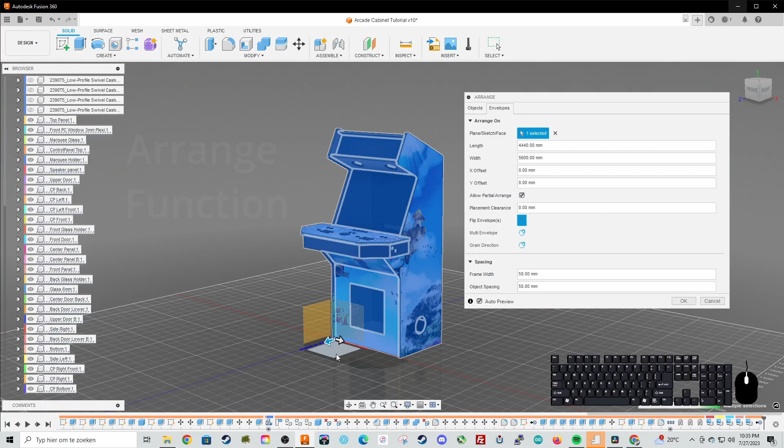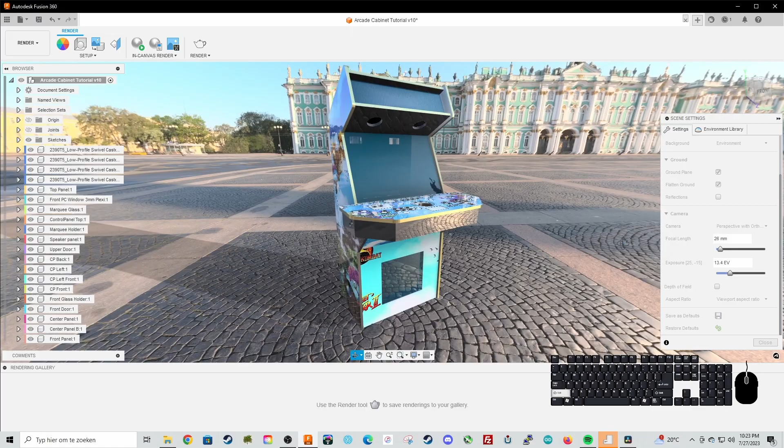Hi, welcome to part 5, the final part of the ultimate guide Fusion 360 tutorial on how to design your own arcade cabinet. In the first few parts we learned how to model this complete arcade cabinet, and it's almost done, almost ready to be built. In this final tutorial I'm going to show you important things like using the arrange function, exporting all the panels so you can cut them in your workshop and make the model. I'll show you how to make technical drawings out of your model in Fusion 360, the joints function so you can open the panels to see how it works in real life, and we'll render it and apply some artwork. Lots of stuff to do. I'm not setting a timer, but I'll try to keep it under 20 minutes. So let's get started.

Let me hide the data panel so we have a good view here. Let's start with the following: remember that we worked on the control panel and designed all the buttons.

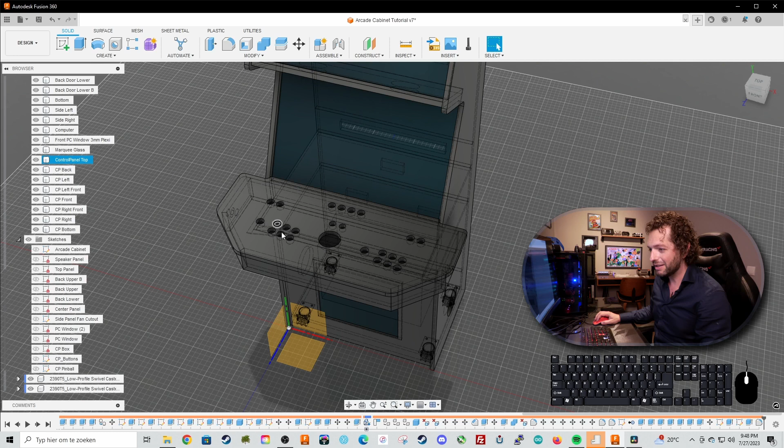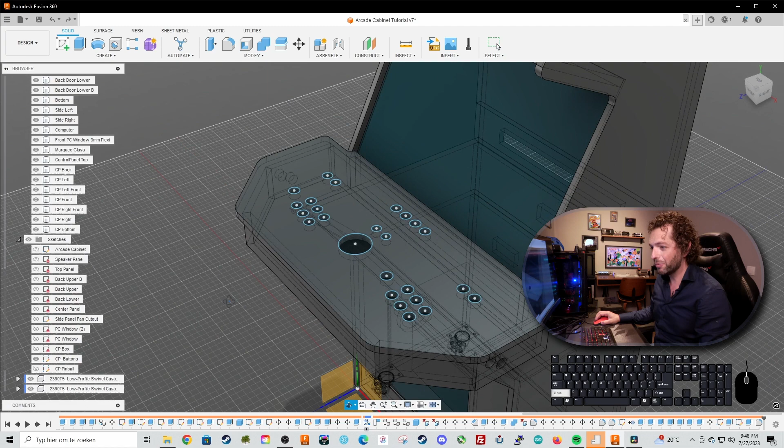This is a sketch, CP buttons, here they are. Remember what I taught you, that if you don't define your sketch and you move one of the buttons, your design will move or update accordingly, which is not something you want. This could be dangerous. Now we can edit the sketch and define all the buttons, but that's a lot of work and maybe we want to change the buttons last minute.

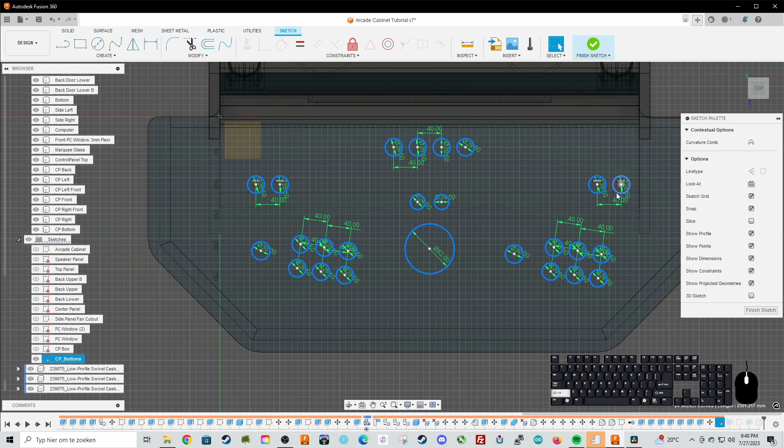So what we're going to do is a quick trick. We select all the buttons, just like this. Normally you should always define every sketch you make, but there's a quick trick. Let me select them all - these are the buttons. Now we right click on the sketch and choose fix, unfix. So choose fix, now the buttons will color green. Let me finish the sketch, and now they can't be moved. If I move the button, there won't even be an arrow to move them. So this is a very safe way of doing it.

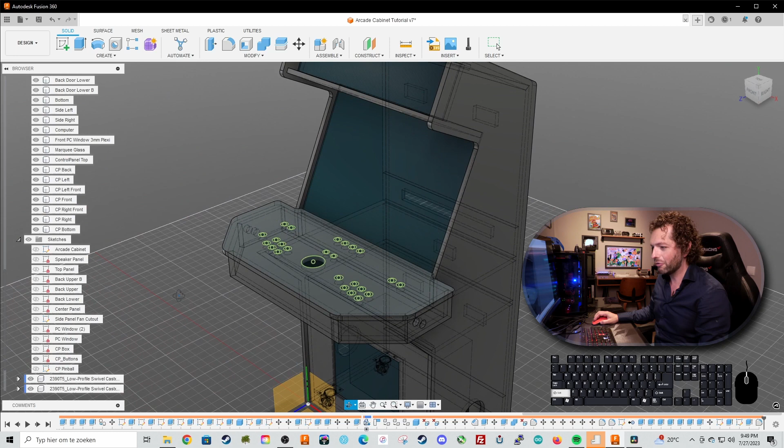Let me close them down. Now the buttons are fixed. Let me save that. And now we cannot move them.

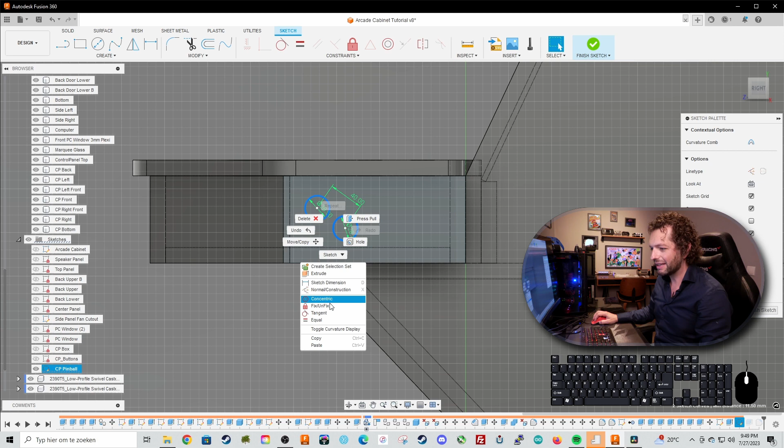And we can do the same thing for the pinball buttons, these are the buttons on the side. Let me edit the sketch, select the pinball buttons, right click and do fix, unfix, finish sketch. So now they are fixed in place.

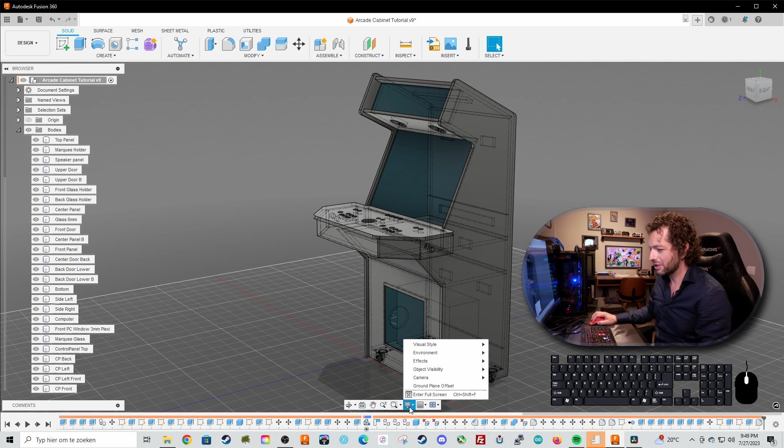Great, let's save the design. Let's get rid of the origin point. Now I'm going to... where's the origin? Here. And now I'm going to show you something really nice. So let's go to visual style and choose shaded with visible edges only.

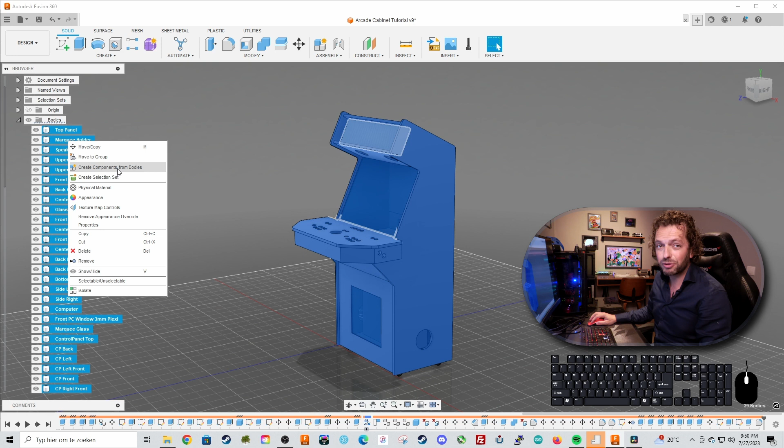And now I'm going to show you how to open these doors. Right now the doors can't move, they're just bodies, and we are going to transform all these bodies. We're going to select them all and transform them. Right click and transform them into components - this is the 'create component from bodies' feature. If we select that, pop, it happened already. So now we have the components made.

Let me show you that now you can take one of the doors and just pull it out. That can be dangerous if you've already completely built your arcade cabinet like we did, but it has some advantages. So let me show you a quick trick.

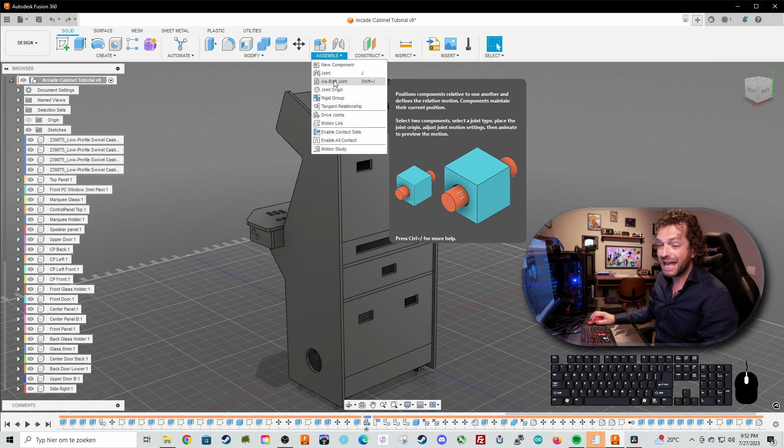Go to Assemble, and you can choose Joint or As-Built Joint. We're going to do the last one, As-Built Joint. Choose type - this is the motion type - to Revolute, which means it can revolute.

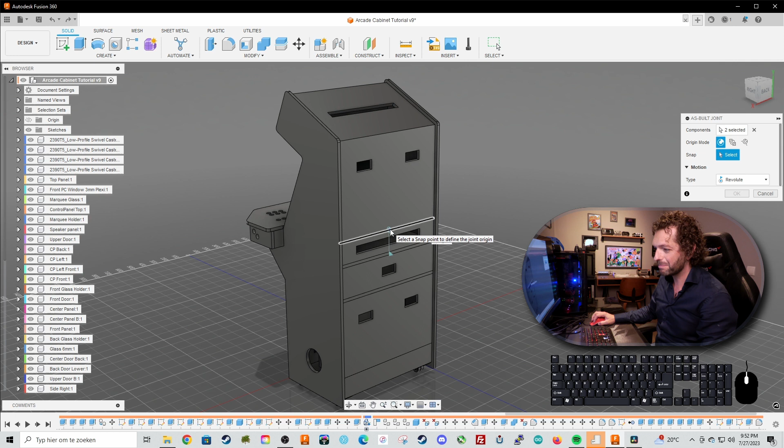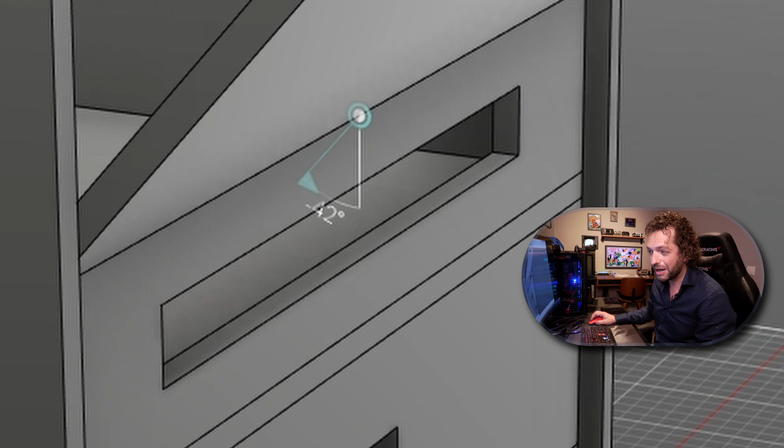Let me select the door, select the panel next to the door, and now select the hinge point, just like this. Now you can see that the door can open. Press OK. You can edit this joint and give it a start and an end point, but let me quickly show you - if you double click on it, now you can open the door, which is really cool. And if the door is open, you can see exactly that it's now open minus 42 degrees, which is really great.

So let me do the other one as well. Let's choose Assemble. An as-built joint is a joint that you use if your model is already built, so the parts that need to slide or revolute are already next to each other at the correct spot.

A normal joint is used if the parts are not at the right spot yet. So maybe this panel is lying flat on the ground here. Then you select the joint and the panels will move together and do the motion you want them to do. But in this case the panels are already at the correct spot.

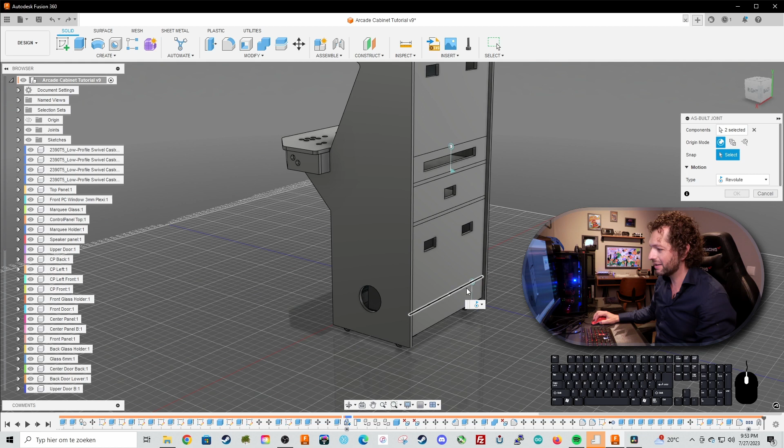So we go as-built joint, a joint just like it is, like this. Make sure revolute is on. Choose the hinge point, and choose OK. And of course you can set a minimum and maximum so the joint will not intersect with other bodies. You can also create contact sets, but that's for another tutorial.

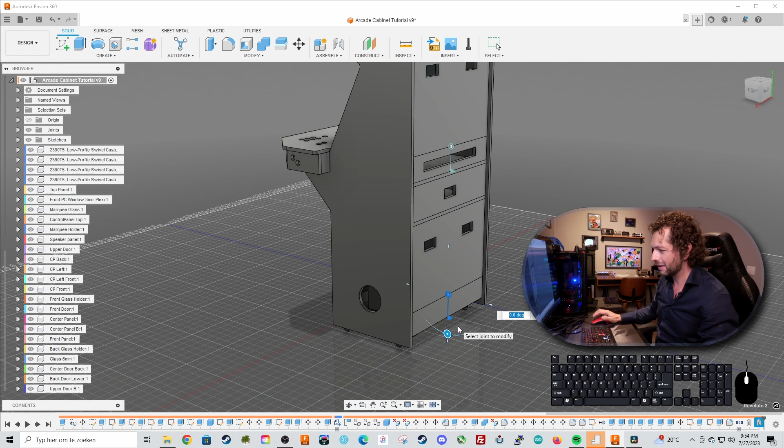But for now this is really cool, that you can open and close the panels. Let me quickly do the control panel so we can see how this works.

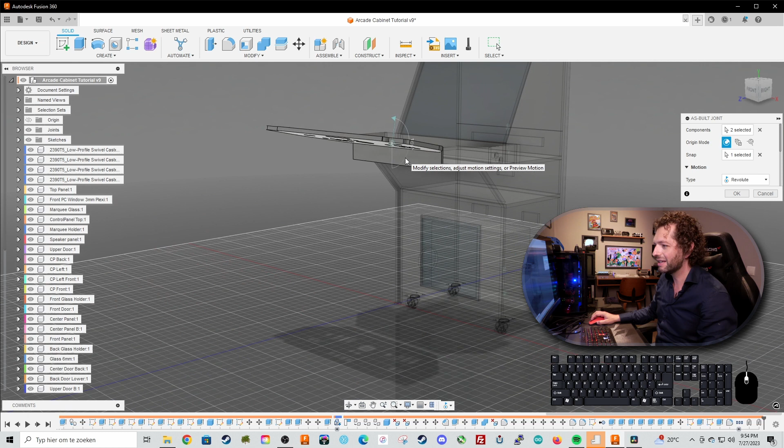Assemble, as-built joint, choose the control panel, choose the part that's next to it. Choose the hinge point, which is right here, just like this. And it's revoluting already, press OK. Double click on the small flag, and now we can just open the control panel, which is really nice. So you have a good understanding of how your model is looking, which can be really, really nice.

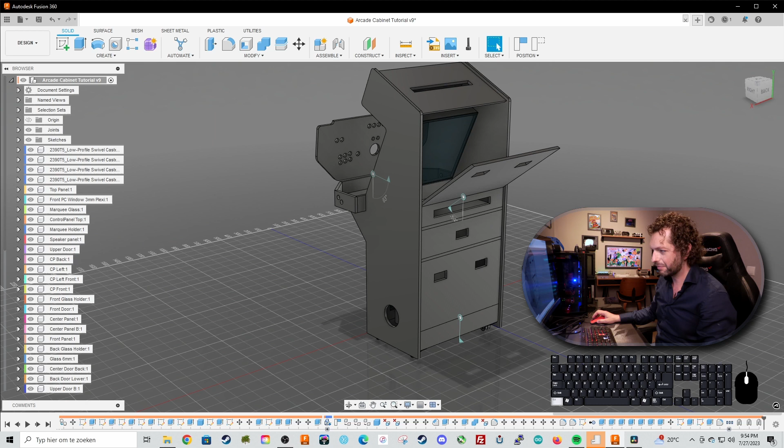Great, now let's hide all the joints. Now let's get some decals on there.

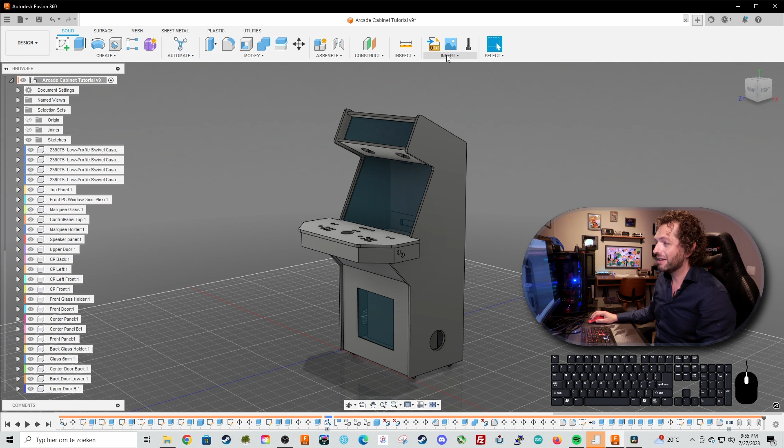Let's say that you already worked on your artwork and now you want to see it on your model. And this is really easy. Make sure that you converted all your bodies into components. Go to Insert and press Decal, insert from my computer. Go to, I think the Adventure Time is right here, one of the side pieces of the cabinet. Select the face of the cabinet, just like this.

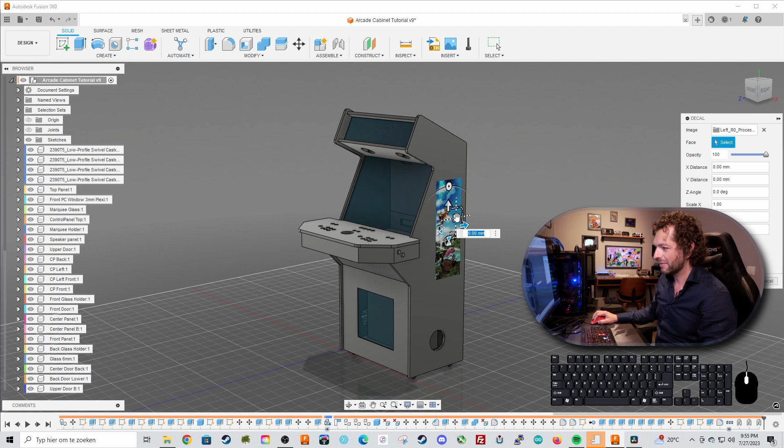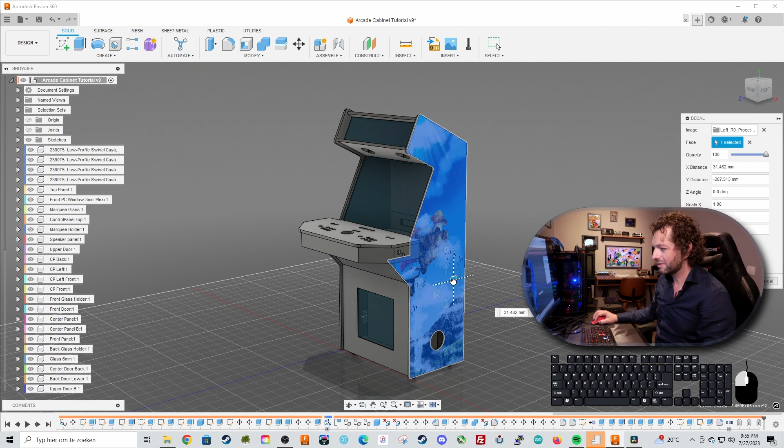Wait a little bit and there it is. Let me make it a little bit bigger here, let me move it around. Make sure that chained faces is deselected, just like this. Maybe make it a little bit bigger, play around with it a little bit. Nice, and it looks really good.

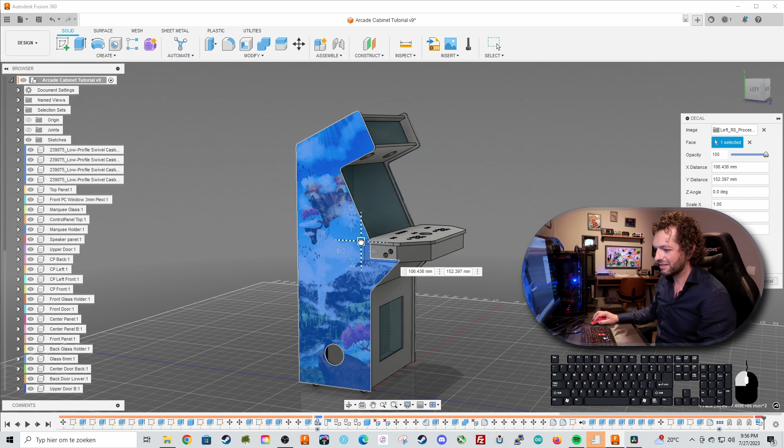Let's do the other side. Insert, Decal, insert from my computer. And you could do JPEGs or PNGs, doesn't really matter. Make sure chained faces is deselected. And there we are, and there we can see Guybrush Threepwood from Monkey Island.

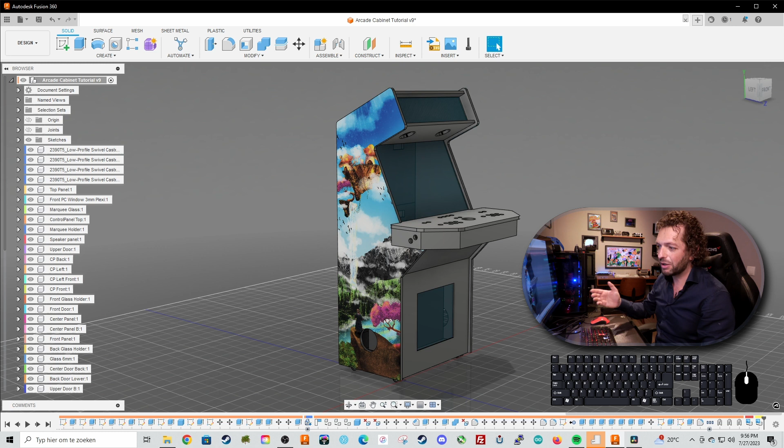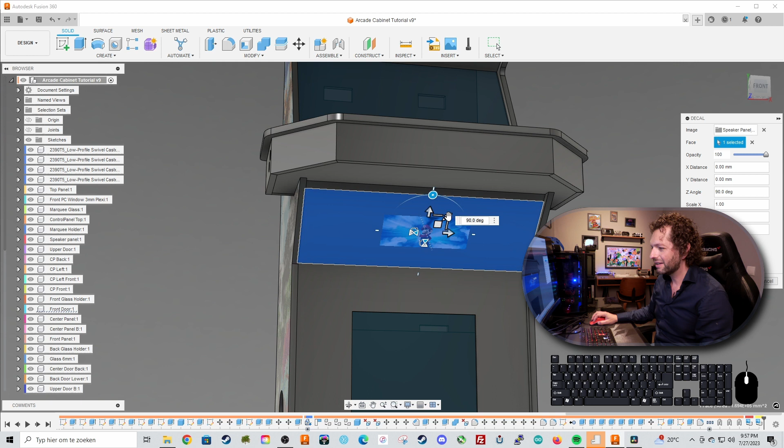Let me select another decal, a speaker panel with Super Mario on it. Let's rotate it, let's put Mario in the middle. And as you can see, this way you can change the complete look of your cabinet.

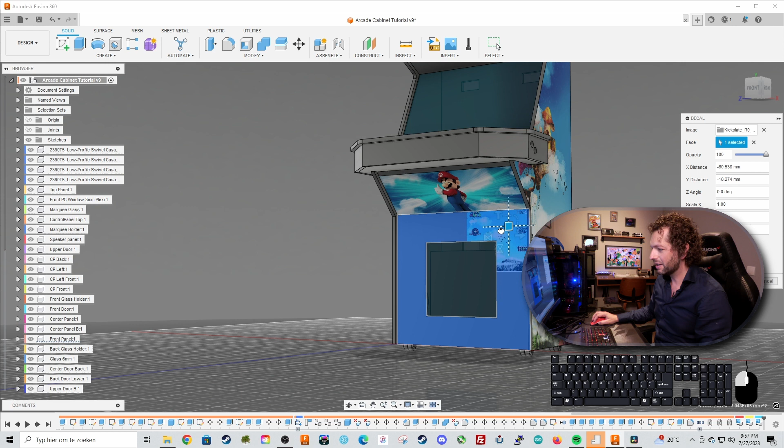Insert decal, insert from my computer. Now there is a large window in this panel which makes it a little bit more difficult for the computer to get it in the right position. So just do it like this. So you cannot really drag it here, it has some trouble with it. So I just make it bigger, or even bigger, just to get a basic idea of the colors, just like this. It looks great already.

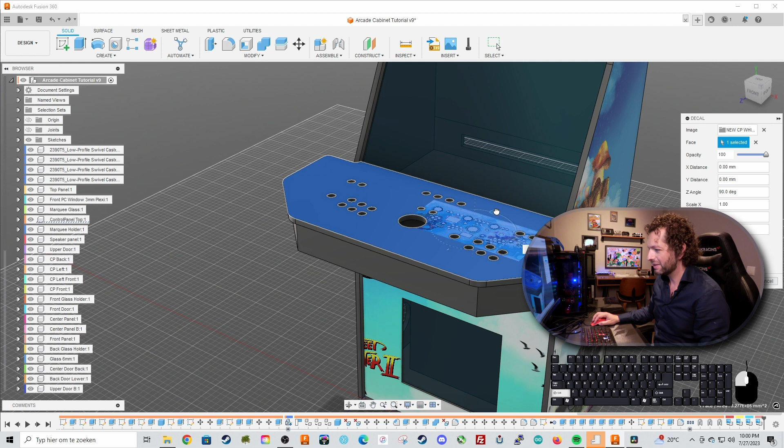Now, for those of you who are interested, let me do the control panel top, which is also interesting to do. Decal. Well, of course, this is a 4-player control panel file, but you get the picture. Let's get it here, let's turn it around a little bit, just like this, make it a little bigger. And it's just to give you an idea of how this works. And because of all the holes, you will not get it perfectly correct, but it's just to give a basic idea of the cabinet, how it would look in color.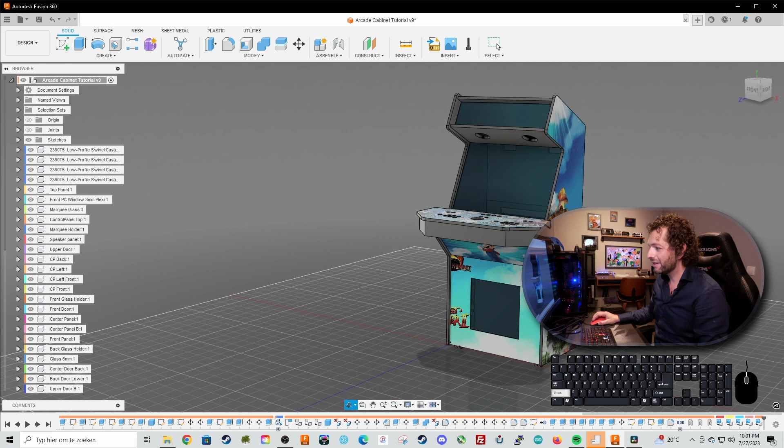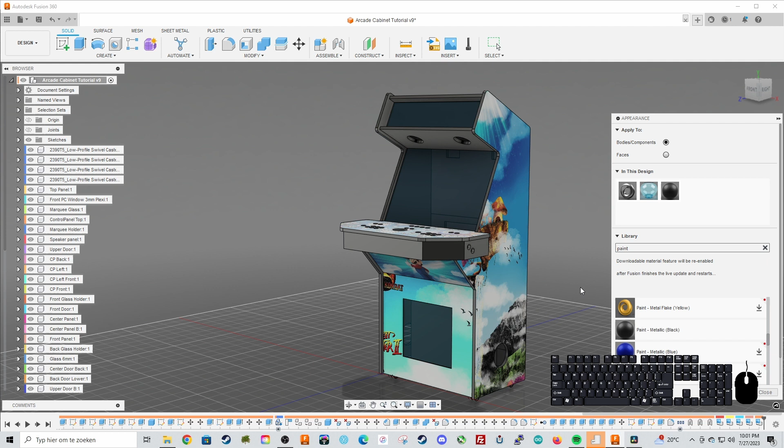The other thing is we could give it some texture, so right click, choose appearance, and let's do some painting. Choose paint and let's take a metallic black, or let me see, powder coat metallic black. Let's try this, yeah, this looks great. Metallic black, just drag it on. Painting was never that easy. All the panels that you want black, you can make black.

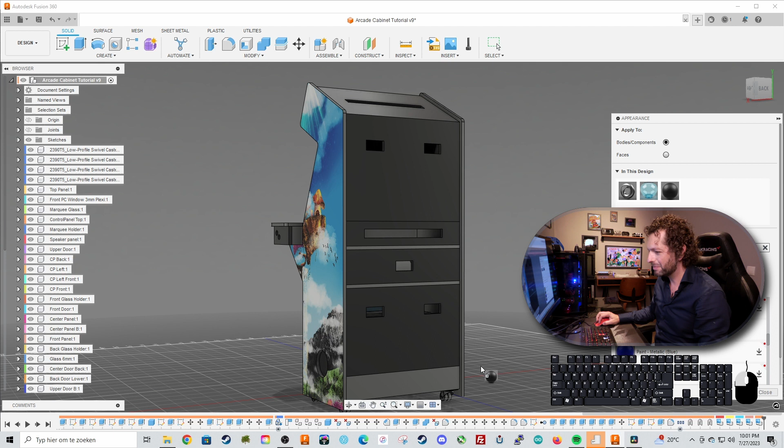Let's do the back of the cabinet, just like this, all the panels. Maybe also the center panels, just like this. Oh, just like this. Oh, again, just like this. And now, so the bottom as well.

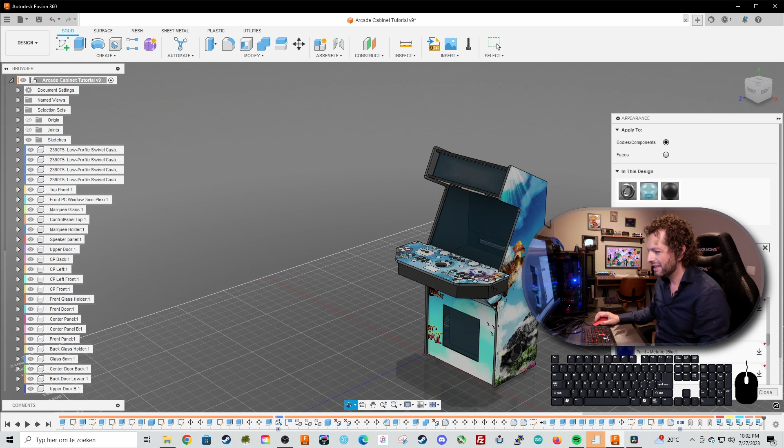Let's add some T-molding, which is also nice, and let's go for gold. Let's see if they have gold T-molding - I mean a gold appearance.

Let's drag that and make sure now that you select faces. Go to the part where you would apply the T-molding and just select it here. If you don't select face but bodies and you do this, now you can see that it gives you a warning and it asks you to remove appearances.

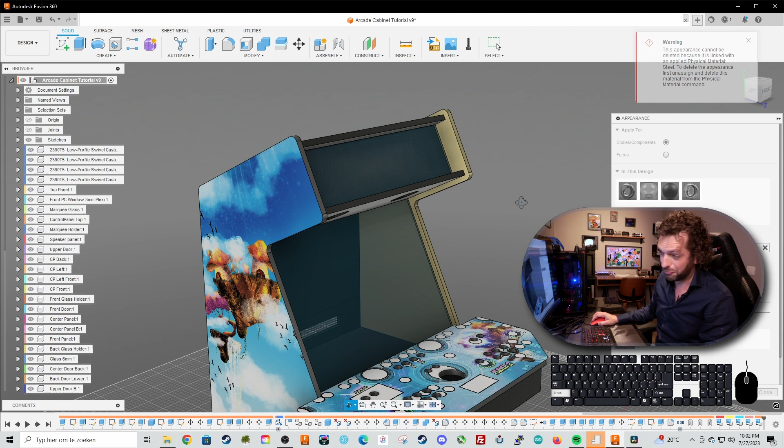If you remove it, now you can see that the entire panel is made out of gold, which is really cool, but it's not something you generally want. So let's undo that, undo that again, just like this.

Now we right click, appearance, gold, make sure faces is turned on, and let me drag it onto the faces. Let's do the control panel, and now we can do the entire cabinet. Let me do that quickly for you and I will be right back.

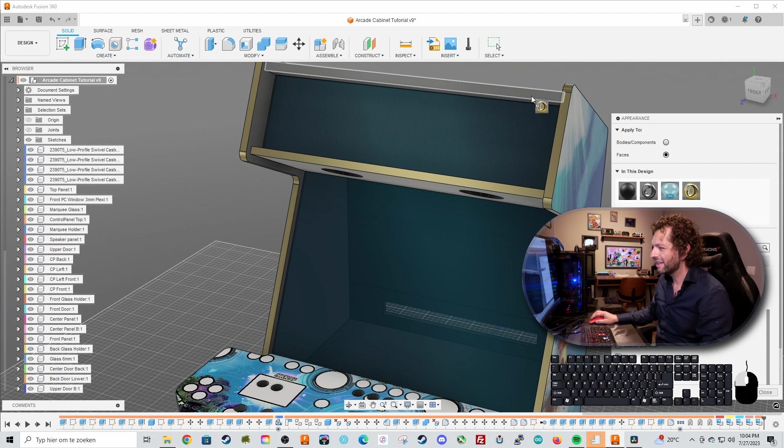And we are done. It would be cool if applying T-molding in real life would be as easy as this is. So great! Our cabinet is looking really, really nice already.

Before I show you how to use the arrange function and export all the separate panels so you can build it in your workshop, I'm going to show you quickly how to make a technical drawing, as you would really need this in your workshop to know all the angles, the miters you need to cut, to see the place of the bottom, the offset and all the dimensions.

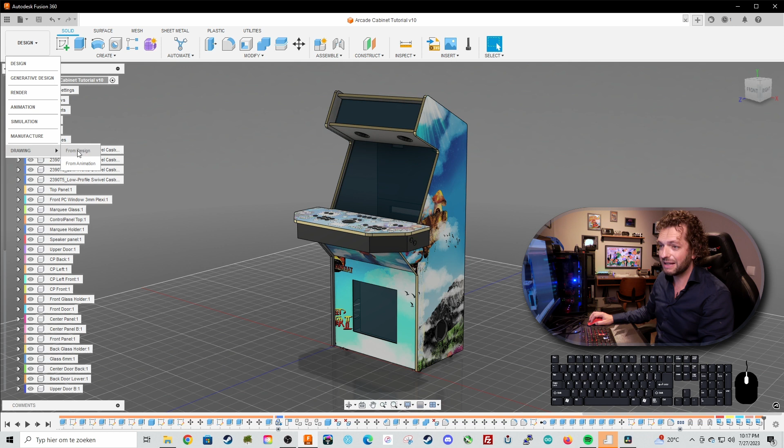So to do this, go to the design button here. We are now in the design environment, but now we are going to the drawing environment, drawing from design. Let's select that - this will take a little while. It selects all of your components or bodies.

Choose the paper size. Let's go for a standard A4 letter format, full assembly, and select OK. This will take a short while. And now we should see a standard letter size piece of paper.

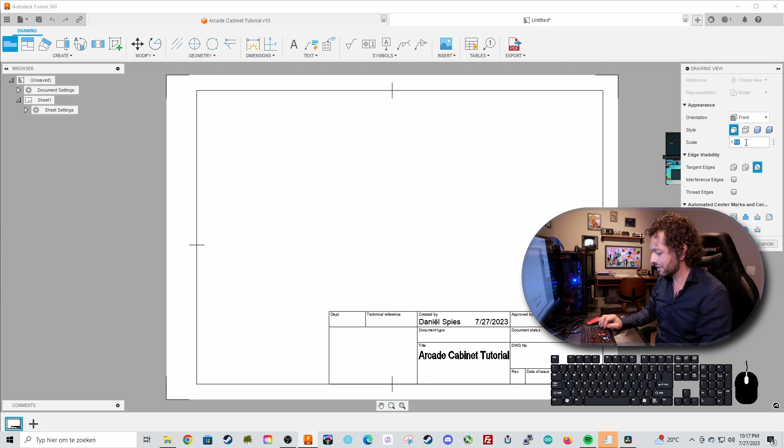Great. With your name on it, with your title, your project title, and you can see the small arcade cabinet already. Let's make it a little bit bigger in scale. Let's say one is 25, maybe one is 15 even, just like this. This will be perfect. Let me place it here, just select it and press OK.

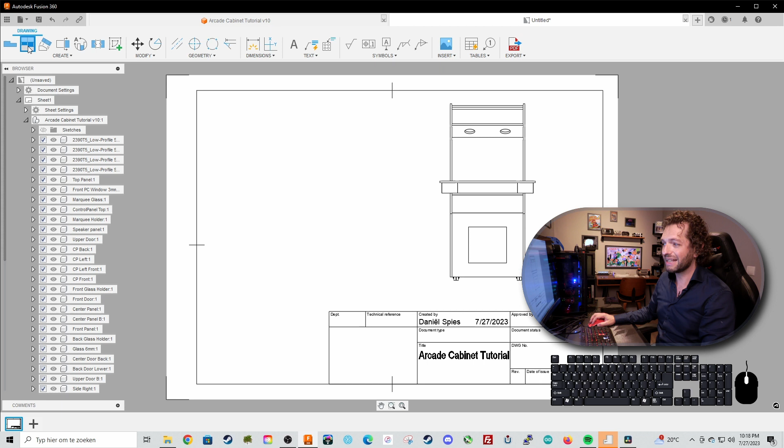And now it made a drawing, a beautiful drawing out of your design. Now let's click the projected view button at the top left corner, select that, select your parent view, drag the mouse cursor to the right or to the left, or even the bottom if you prefer, or diagonally, and you can see that your design changes accordingly.

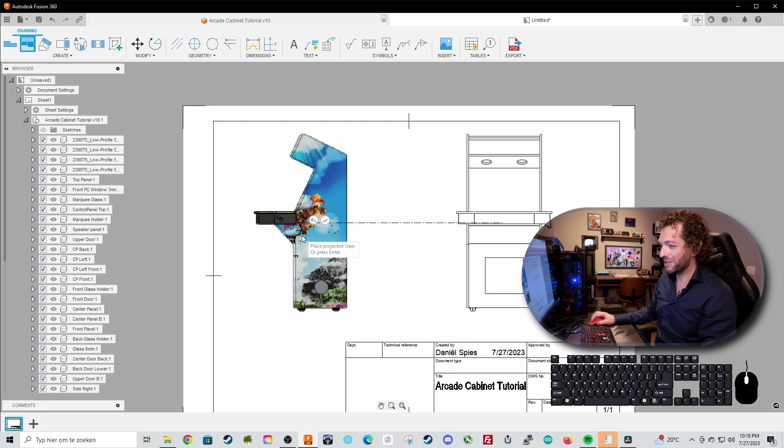So let's do the left or the right of the cabinet, change it, bring it to the left, which shows you the right of the cabinet, create and continue. And now we have two sides of the cabinet, the front and the right side.

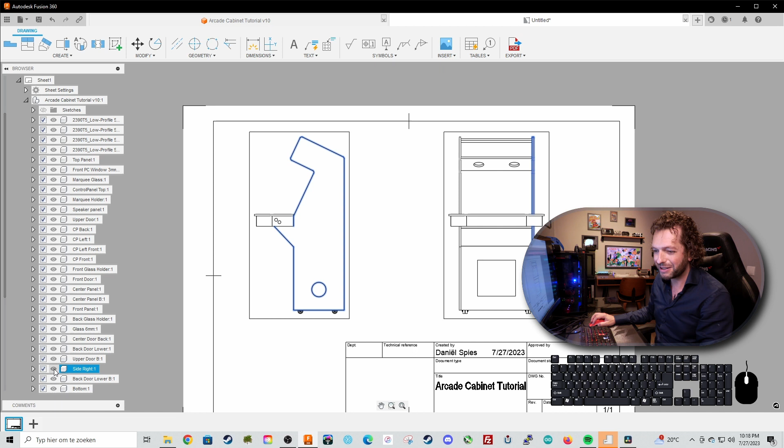Now I want to look into the cabinet, and to do that it's really cool. You can just choose the right side and select this small eye icon, and we open it up and you can see that it moves right here. It's gone now, and we can look inside the cabinet, which is really handy.

As we are going to give it dimensions here, and this is something you will print out, take to your workshop and use it as your building guide. So to give it dimensions, just as you have learned in the sketch environment, press D, select any board, select it, drag it out, and there you have your dimensions.

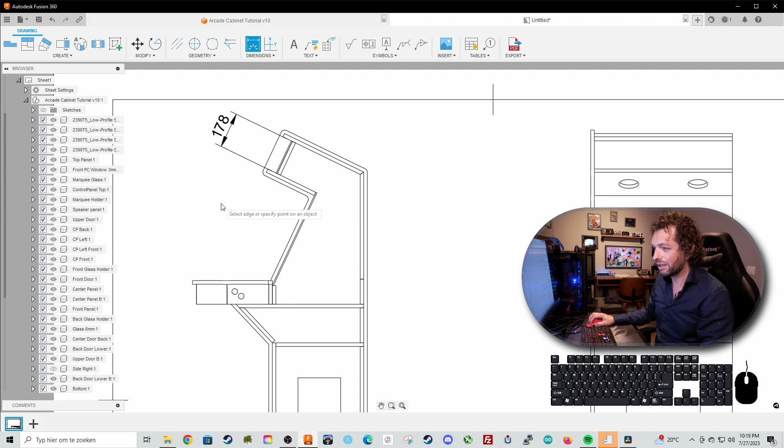If you want angles, select two angles, set an angle here, and this is especially nice at these angles here, as of course these are special ones you need to cut with your miter saw or your table saw. You could do them here.

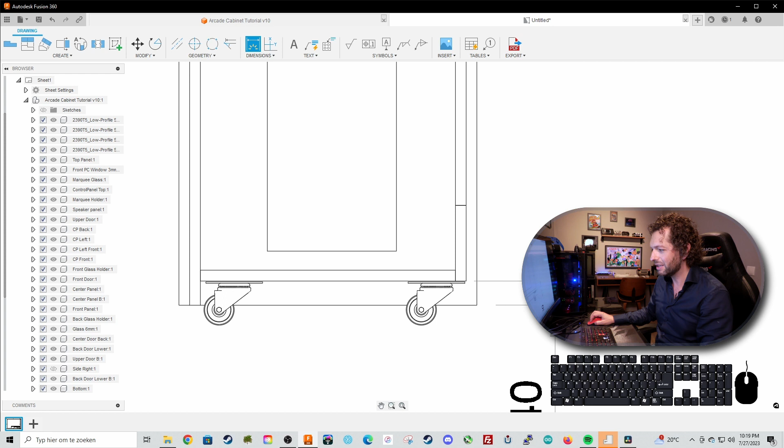Let's do the bottom, and remember that we set 40 millimeters. If you want to set this a little bit higher, you can move it here. You can play with that.

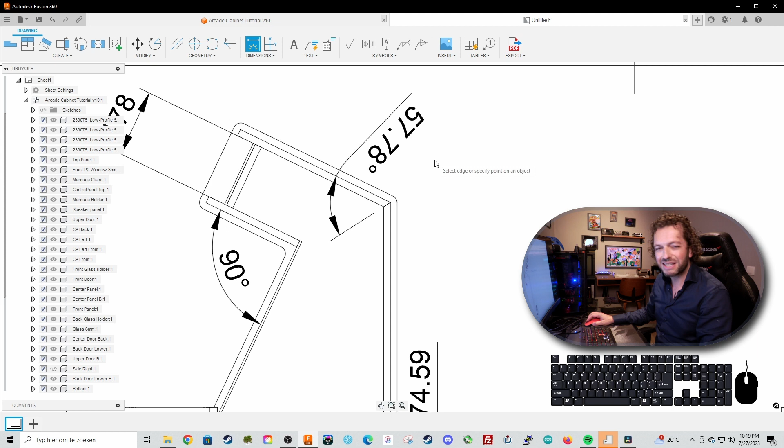This is the computer, this is the back door, and this is also a nice angle to know - this is 57.78. So this is a great way of making your own technical drawing, which is really easy and really fast, and I especially encourage you to do this.

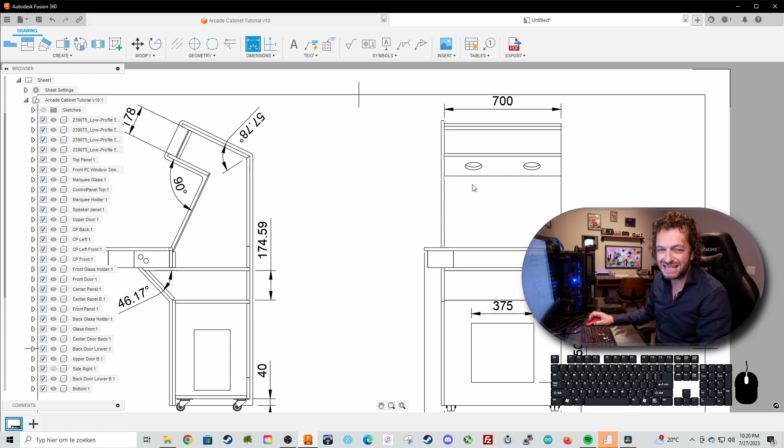It takes a little bit of work, but even if you're using a CNC machine, it's just easy to see if your cuts are being made well.

Now if you want to measure the complete height of the cabinet, you would do this with the dimension tool. Select the highest point, and now you want the lowest point, where the wheels are touching the ground. But if you snap to this, it's not working correctly because it's at an angle, which will not give you the correct dimension.

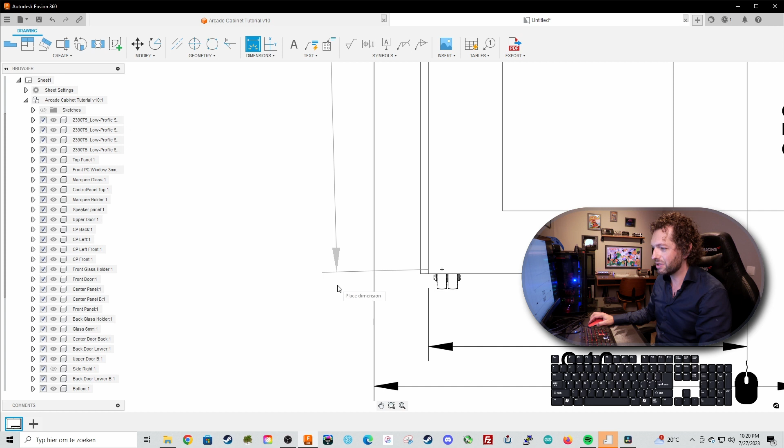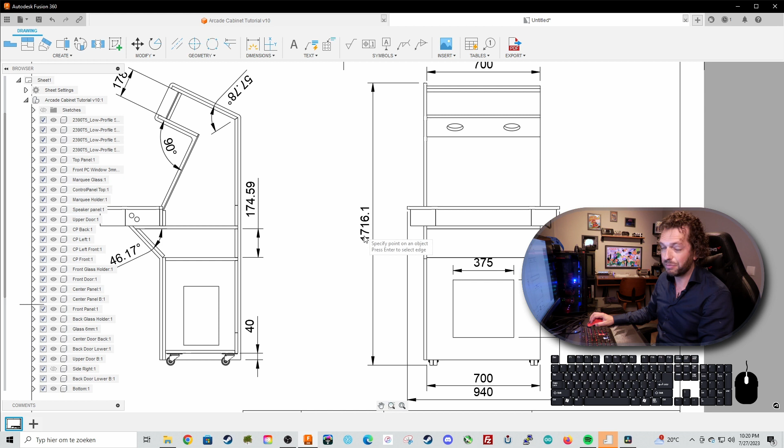To do this, go to the Dimensions tab and choose Linear Dimension. Select the top of the panel, select the lowest point of the panel, right here. If you click on it, your line will be straight, and now you can see that the complete height of the arcade cabinet is 171 centimeters. So this is an absolute beautiful way of making a technical drawing.

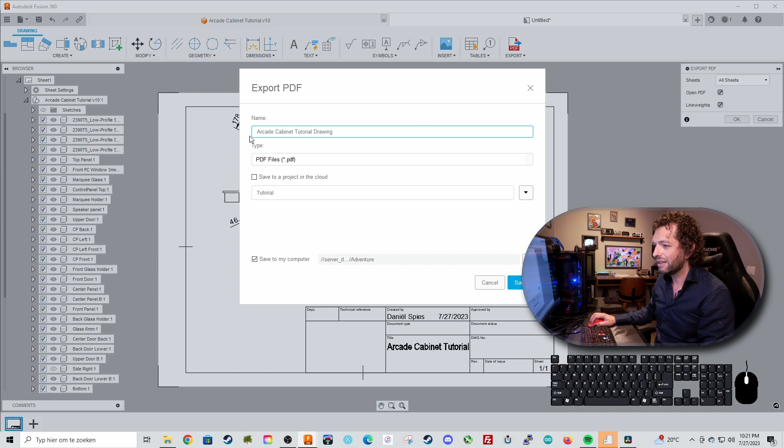Let me export this, export PDF, all sheets. We can even open the PDF if you press OK. It asks you to name the PDF, so we call it Arcade Cabinet Tutorial Drawing PDF, and save it to my computer, on my desktop for now. There it is, and it will open the PDF just like this, and we can easily print it out.

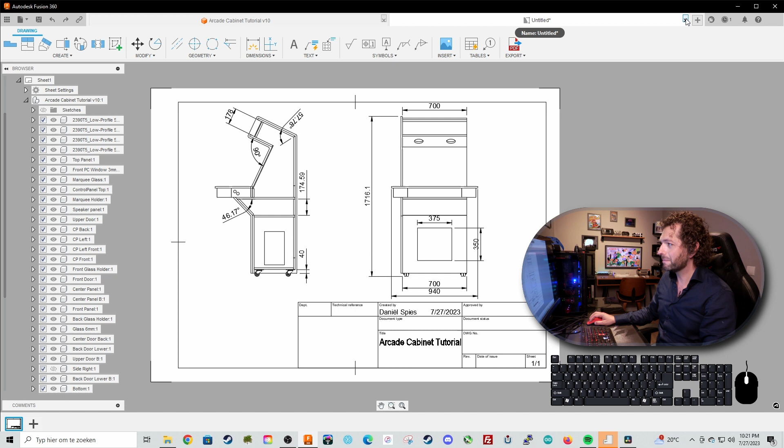So this is a really handy tool. If you want to get out of the drawing environment, just close it. You already saved it, or you can save it, but I already did, and we are back in the design environment.

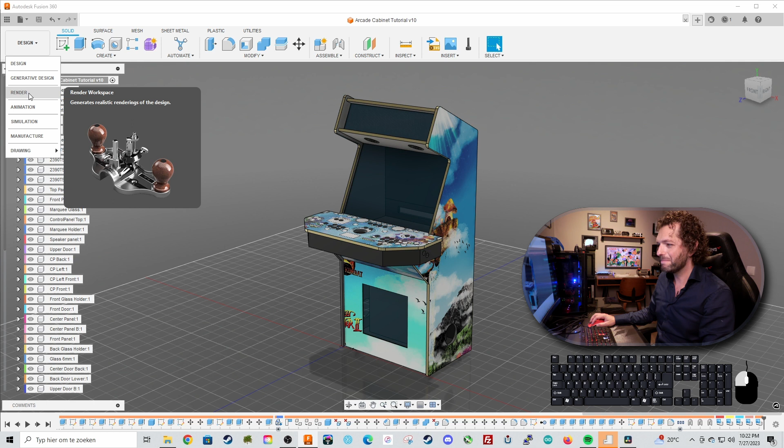So, another tip, how to render your design. Let me show you how this works. Go to the design environment, select render. Now all the materials that you have chosen, the lighting, the glass, everything will be rendered accordingly, just like in a computer game or anything you model in 3D space. You can add light, add environment, and then your model really starts to look realistic. Let me quickly show you how to do that.

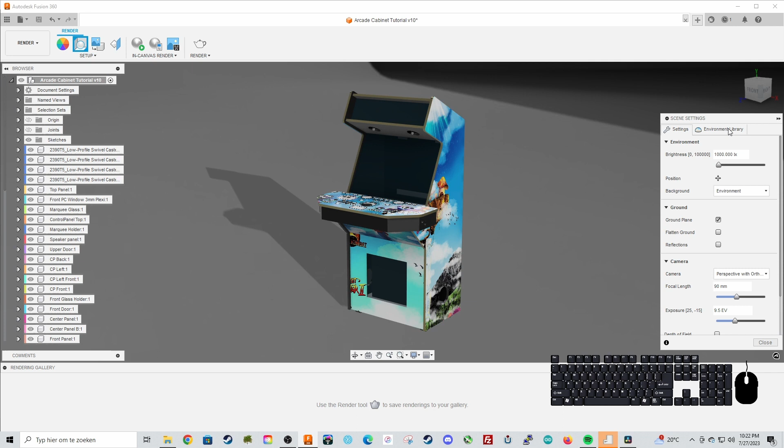Go to Setup, go to Scene Settings, and then let's choose not a solid color as background, but an environment, just like this. Now go to your environment library and select any environment you want. Let's say Plaza, double click on it. Go back to settings, make sure you select flatten ground. Now it's already starting to look real. Well, realish, a bit real.

Let me go down. Let's set the focal length of the camera to maybe 24 millimeters, well, 26 millimeters. And now your arcade cabinet is really getting shape. You can see my paint is maybe a little bit too glassy now, but the rest is working. So just set it however you want, just like this. You can also change where the light is, change the world, and move everything you like. But just for this tutorial, it's a great tip to use the render environment.

You can choose this button here, In-Canvas Render if you select it. Now it's rendering live, and you need a pretty strong computer to do this live. My computer is okay, but as you can see here, you see the time that has elapsed. It will take a minute, and now it's rendering out piece by piece, looking like a real arcade cabinet. And every time you move your camera, just like this, you can see the beautiful reflections, and now it's rendering again.

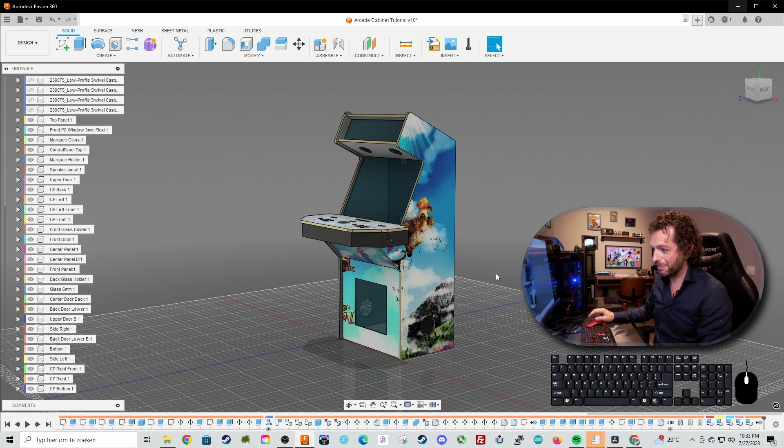And now let's go back to the design environment. And I'm going to give you the best tip, I think, of this entire tutorial: how to export all the small panels, lay them flat on the ground so you'll be able to export them and build them, or print them out, stick them on a piece of wood, and build them yourself.

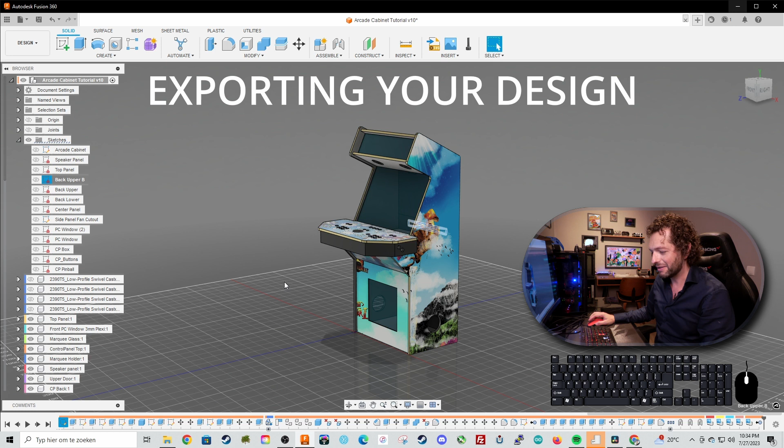What you could do is make sketches of every component, select the sketch, right click on it, save as DXF, save it on your computer, open it up in Illustrator, do that for every DXF, and make one big panel the size of your MDF panel, and do it like that. But that will take ages, and there is a quick and easy way to do this.

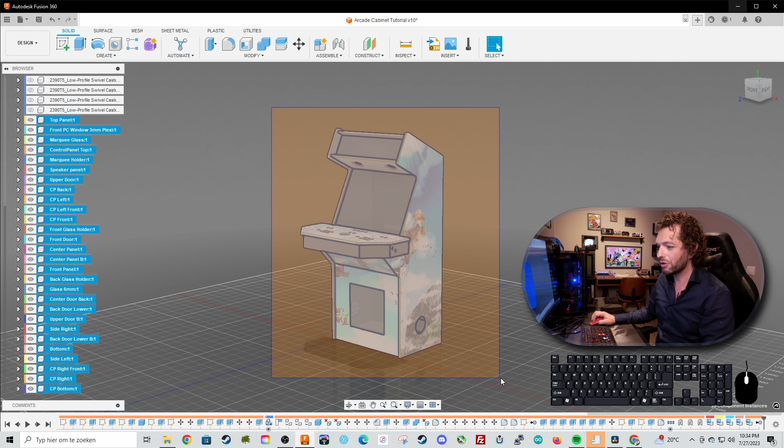Make sure you converted your bodies into components. Now we're going to select all the components, just like here. Make sure you select them in the browser menu, not by dragging your mouse cursor over it. Hold Shift, select them all. Now go to Modify and then Arrange. This is a great feature.

If you have the very expensive paid version of Autodesk Fusion 360, the 200 euros a month version, you can just tell it how many panels you have, and it will distribute all the panels evenly on all the MDF boards. If you have the free version of Fusion, you can do it the way I'm going to teach you now.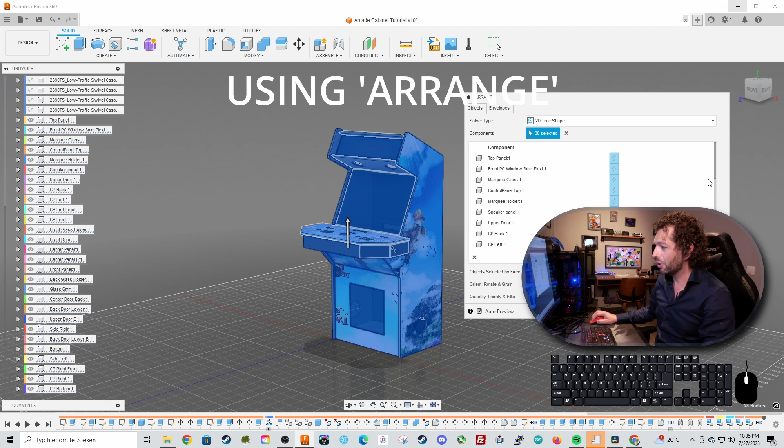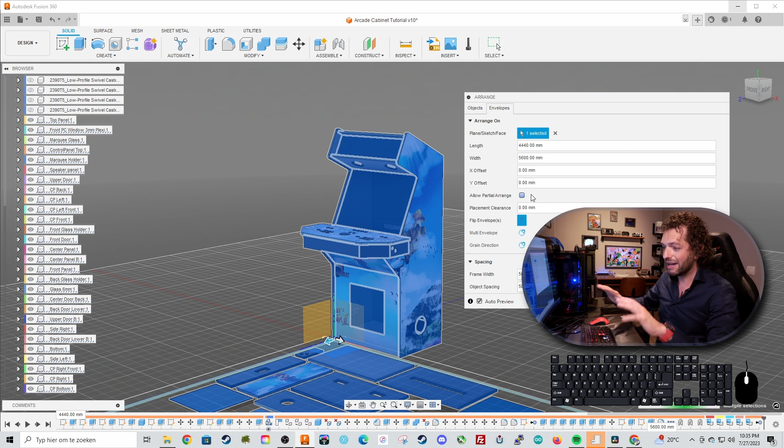Make sure all the objects are selected, just like this. They have small boxes here, so everything is selected. Go to Envelopes and select the plane on which you want to put all the panels flat, so select the ground plane, and now choose a length and a width. Deselect Allow Partial Arrange, since you want the entire model distributed on your plane.

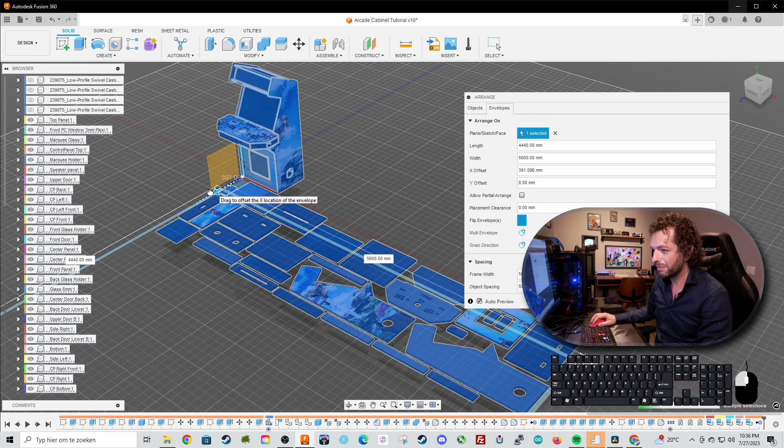This plane is of course far larger than a piece of MDF, but since this is the free version of Fusion, we cannot have multiple envelopes, so we do it on one envelope and just make it big enough. Let's move the envelope a little bit out of the way, like this. We can set the spacing here, so we did a spacing of 50 millimeters. We could do many more features, but let's just leave it like it is. Press OK, and now your complete cabinet is copied, and it's flat.

Let me get the top view. It's flat on the ground, and now it's really easy to make one big sketch.

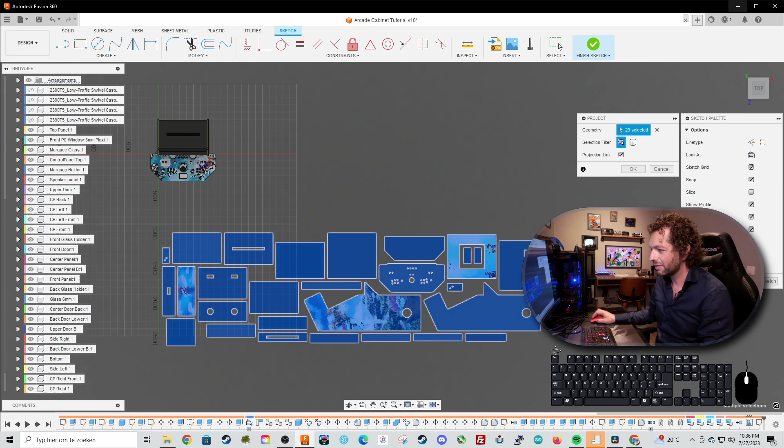Right-click, choose Create Sketch, and now, with P for project - maybe I haven't taught you that yet, so let me teach you now - with P, select all the panels. This is the project feature, which means it's projecting different sketches or different faces into your current sketch. Project everything like this, all the panels, press OK. Deselect Projection Link, press OK. And now, as you can see, we have a sketch with all the panels there.

Now let's find the sketch in our browser menu, just like this - it's sketch number 17. Let's call it Full Arcade. Now right click on that, save as DXF, and on my desktop let's call it Arcade Cabinet Full Export.